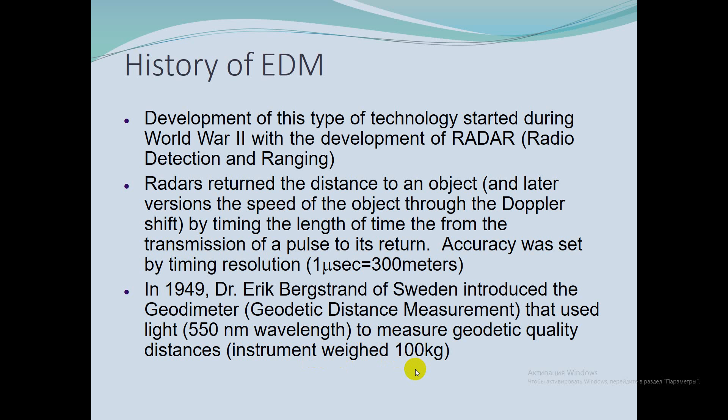We know that this device was first introduced in the late 1950s. At first, they were complicated, large, heavy, and suited primarily for long distance. And now EDMs use either infrared light waves or microwaves, radio waves. Microwaves require transmitters and receivers at both ends. Infrared uses a transmitter at one end and a reflecting prism at the other, and is generally used more frequently.

About distance. Infrared and laser EDM instruments come in long range, 25 kilometers at night and 10 during daylight. EDM instruments can be mounted on the standards or the telescope of most theodolites, and additionally they can be mounted directly in a tribrach.

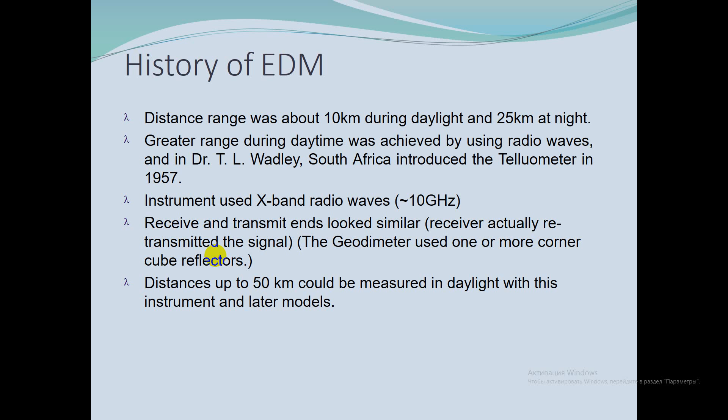About properties. EDMs come in long range, 10-20 km, medium, 3-10 km, and short range, 0.5-3 km. Range limits up to 50 km. They are typically mounted on top of a theodolite but can be mounted directly to a tribrach. So, total station equals theodolite with built-in EDM plus microprocessor.

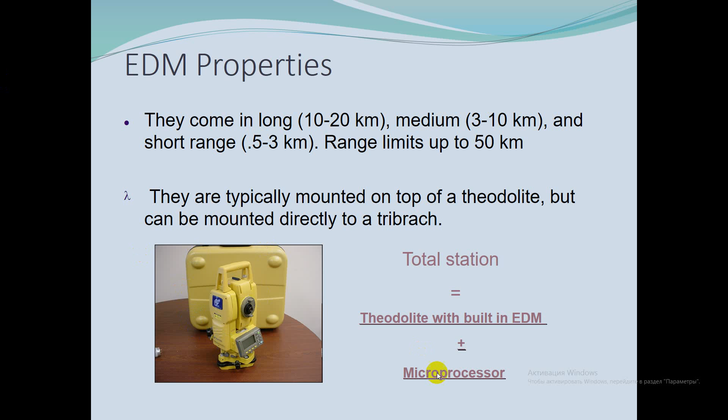Classifications. Described by form of electromagnetic energy: the first instruments were primarily microwave, and present instruments use some form of light, that is laser or near-infrared light. Described by range of operation: generally, microwave instruments have a 30-50 km range, were developed in the early 70s, and were used for control surveys. Light EDMs generally have a 3-5 km range, used in engineering and construction.

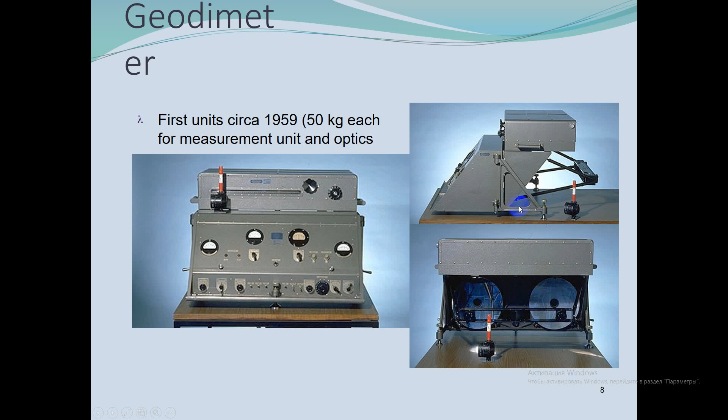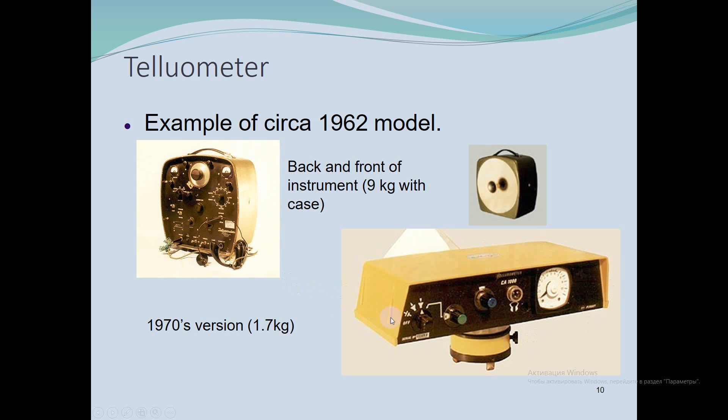About distance and other properties. EDM is very useful in measuring distances that are difficult to access, or long distances. We have a transmitter and reflector, and it measures the time required for a wave to be sent to a target and reflected back. Current EDM instruments use infrared light, laser light or microwave. The microwave system uses a receiver-transmitter at both ends of the measured line, whereas infrared and laser systems utilize a transmitter at one end of the measured line and a reflecting prism at the other end.

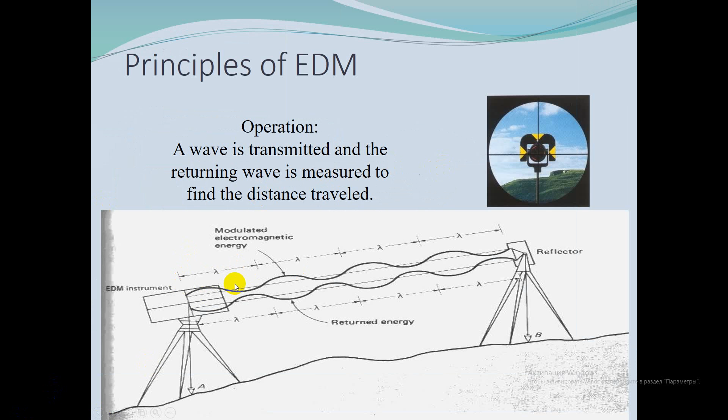So, you have already seen that the double distance 2L is equal to a whole number of wavelengths, n multiplied by lambda, plus the partial wavelength. The distance is determined by calculating the number of wavelengths traveled. So the number of wavelengths, n multiplied by lambda, plus the partial wavelength, divided by 2.

Errors are generally small and insignificant for short distances. For longer distances, they can be more important. Important errors can be accounted for manually or by the EDM if it has the capability. And you must understand that the velocity of light can be affected by temperature, atmospheric pressure, and water vapor content.

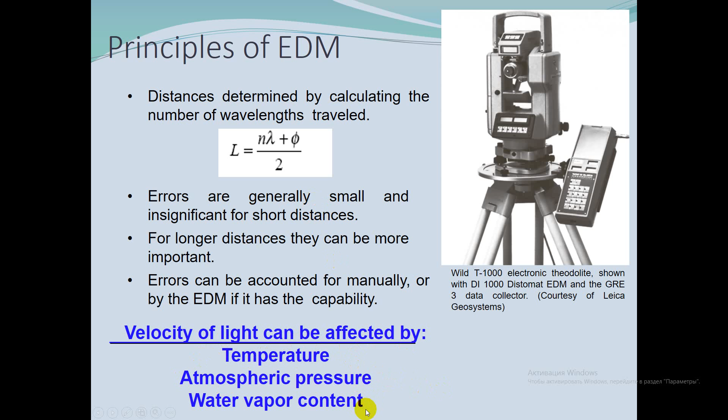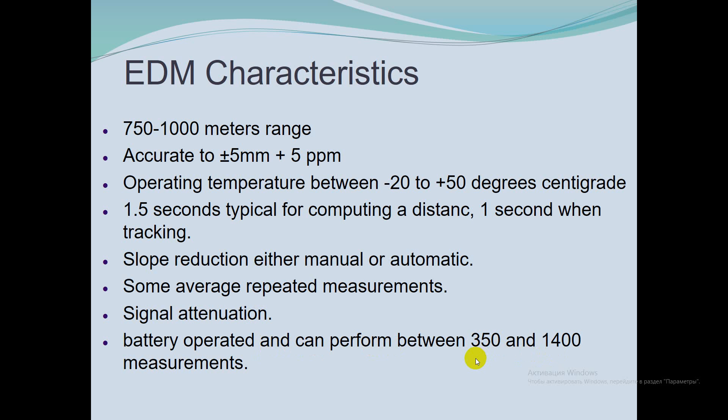Slope reduction either manual or automatic. Some average repeated measurements. Signal attenuation, and battery operated and can perform between 350 and 1400 measurements.

Accuracy. Distance is computed by numbers of wavelengths generated plus partial wavelengths divided by 2. Standard or random errors are described in the form of plus minus constant plus parts per million.

Constant is the accuracy of converting partial wavelengths to a distance, and parts per million is a function of the accuracy of the length of each wavelength and the number of wavelengths.

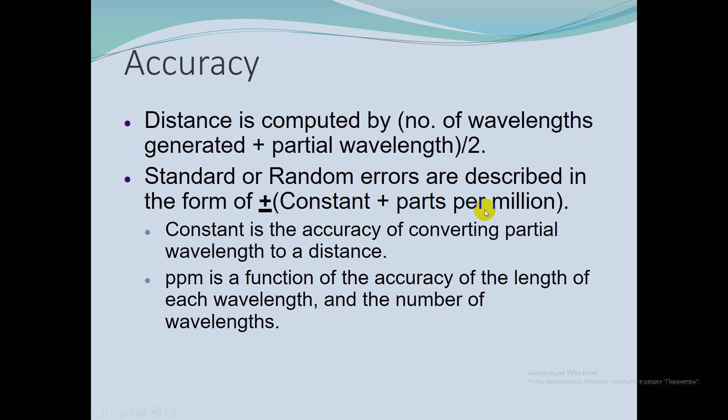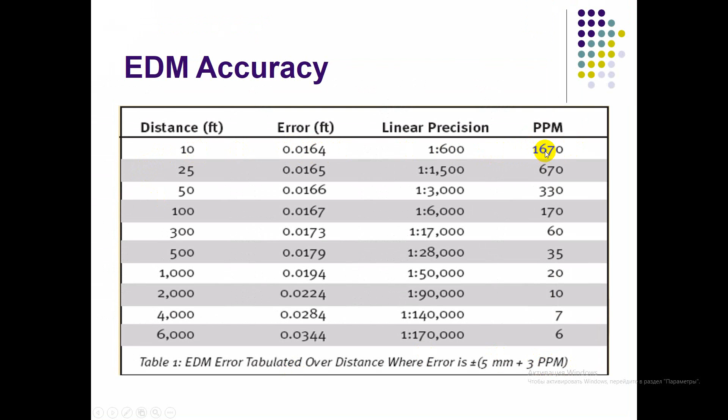So EDM accuracy, you can see on the table of errors tabulated over distance, where error is 5 millimeter plus 3 parts per million. So for distance 10 feet, errors, linear precision, and parts per million, 1670, etc. About errors and accuracy.

EDM instrument accuracies are stated in terms of a constant instrumental error and a measuring error proportional to the distance being measured. So typically accuracy, you already know. Both the prism and EDM should be corrected for off-center characteristics.

The prism instrument constant, about 30 to 40 millimeters, can be measured by measuring AC, AB and BC, and then constant is AC minus AB minus BC. So instrument or prism constant value can be field checked in the following manner.

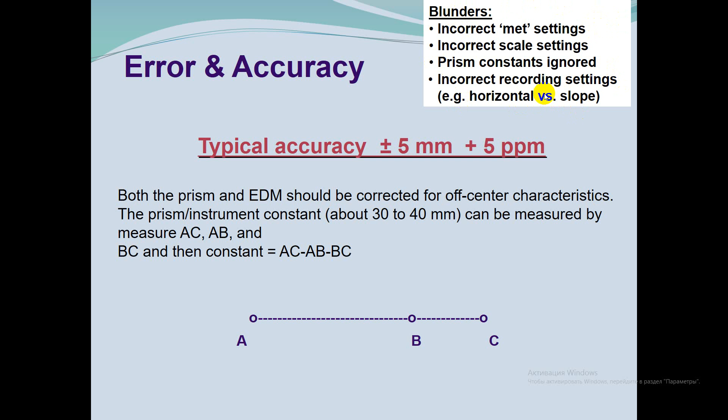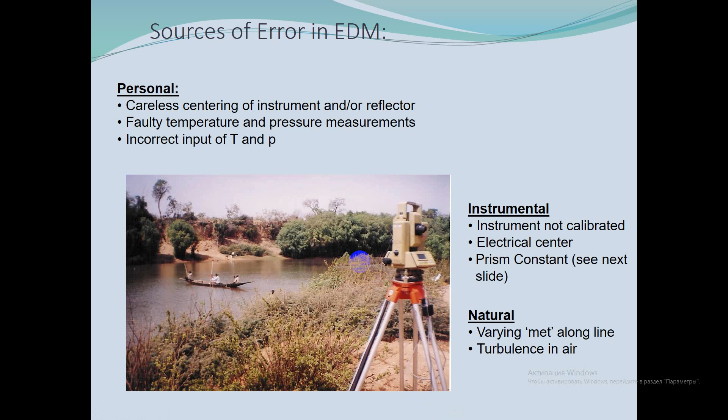So, sources of error in EDM. Personal: careless centering of instrument and/or reflector. Faulty temperature and pressure measurements. Incorrect input of T and P. Instrument: not calibrated, very important. Calibrate in time. Electrical center. Prism constant. Natural: varying met along line. Turbulence in air, etc.

So, determination of system measuring constant. Measuring AB, BC, and AC. Then AC plus K. K represents the prism constant. So AC you can present like AB plus BC plus K plus K. So K will be AC minus AB plus BC. If electrical center is calibrated, K represents the prism constant.

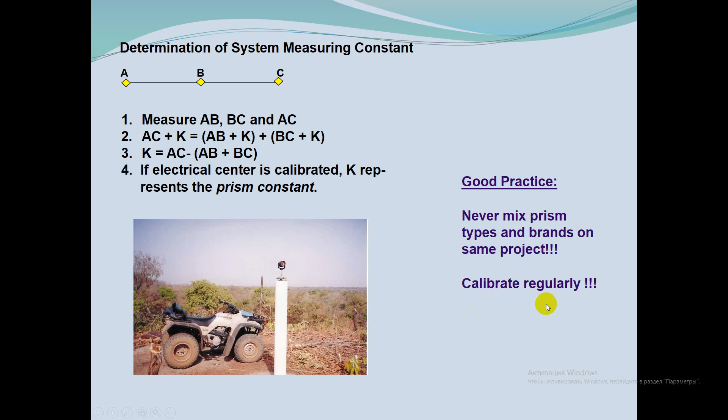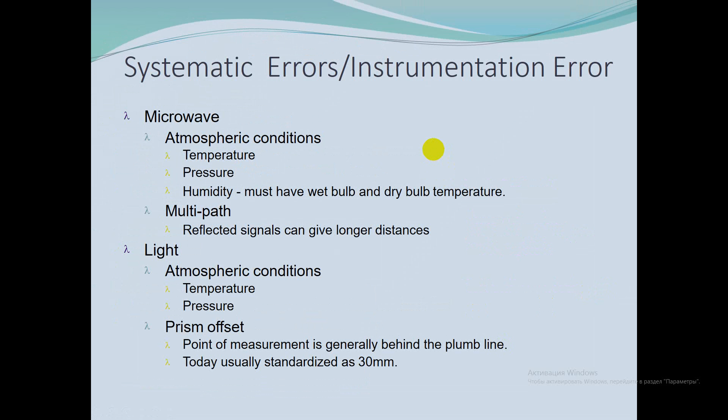Good practice: never mix prism types and brands on the same project, and calibrate regularly. Systematic errors, or instrumentation errors. Microwave: atmospheric conditions include temperature, pressure, humidity; must have wet bulb and dry bulb temperature. Multipath: reflected signals can give a longer distance. Light.

Includes atmospheric conditions, this is temperature and pressure, and prism offset; the point of measurement is generally behind the plumb line, and today usually standardized as 30 millimeters.

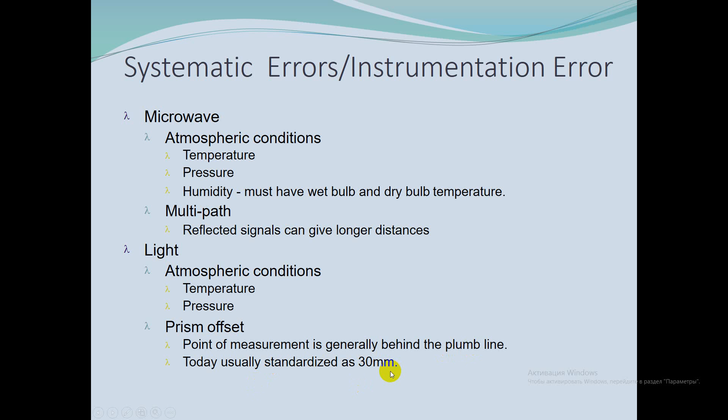Aim. The EDM is aimed at the prism by using either the built-in sighting device on the EDM or the telescope. Yoke mount EDM will have the optical line of sight a bit lower than the electronic signal. When the crosshair is sighted on target, the electronic signal will be maximized at the center of the prism. Set the electronic signal precisely on the prism center.

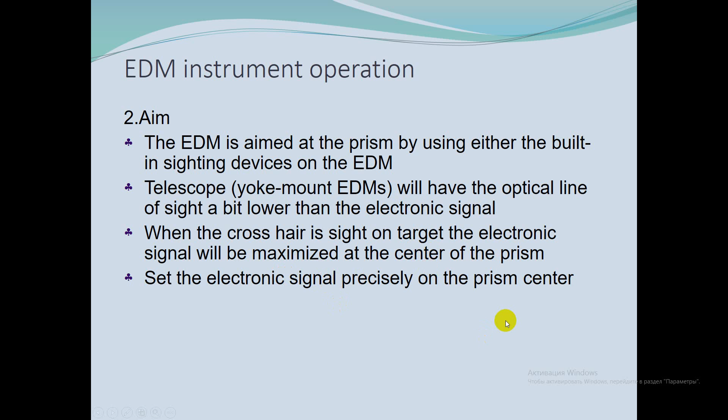Measure. The slope measurement is accomplished by simply pressing the measure button. Displays are either liquid crystal or light emitting diode, LCD or LED. The measurement is shown in 2 decimals of a foot or 3 decimals of a meter. EDM with the built-in calculator can now be used to compute horizontal and vertical distances, coordinates, atmospheric, curvature and prism constant correction.

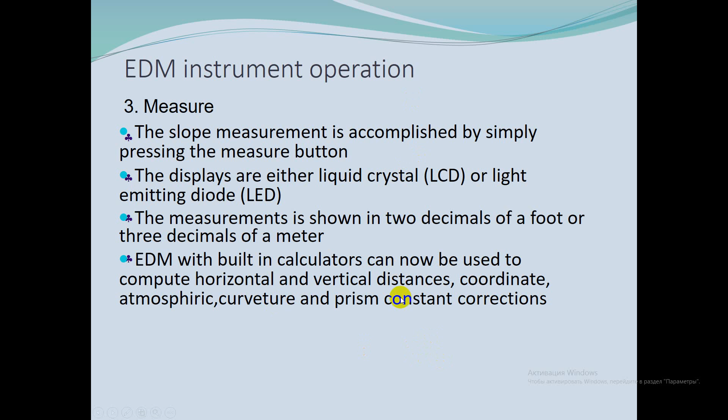About record. The measured data can be recorded in the field note format, or can be entered manually into an electronic data collector. And very important, the distance data must be accompanied by all relevant atmospheric and instrumental correction factors.

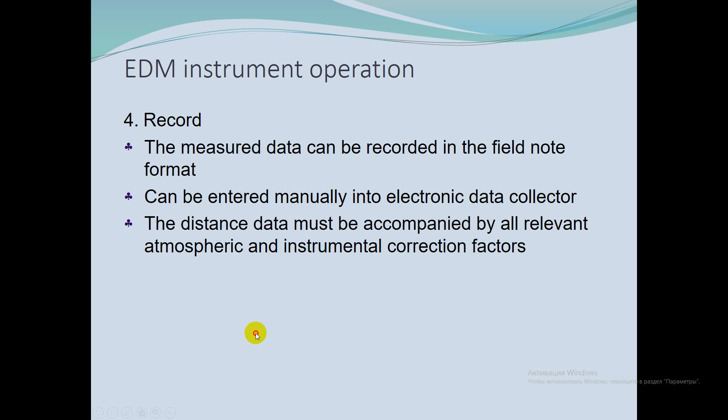Uses. Total stations are ideal for collecting a large number of points. Topographic and as-built, monitoring and control, construction layout. They are commonly used for all aspects of modern surveying. Only when harsh conditions exist or distances are short will a transit and tape be used.

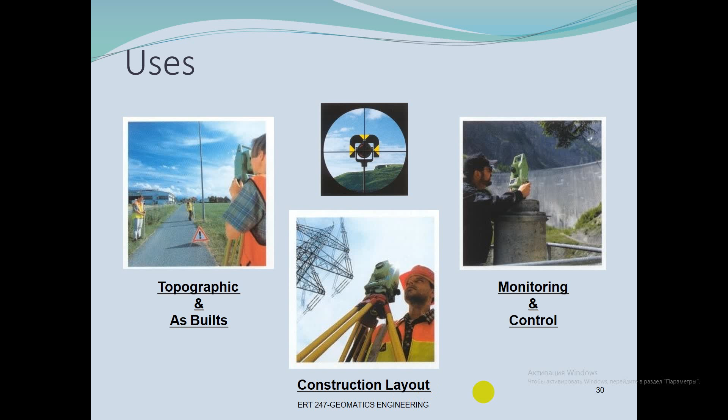So you already know uses and disadvantages of EDM and understand the properties and principles of electronic distance measurement. So you must understand, for a civil engineer, there is no such thing as a little mistake.